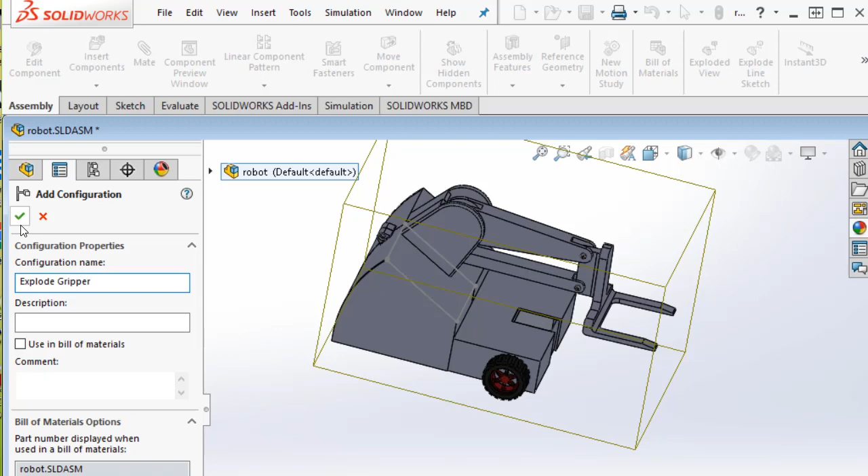Now right down the bottom of here, which I can't find, does this, bring it up into the window. There's a thing called a display states, and we're in a particular display state now, so I'm going to create a new display state.

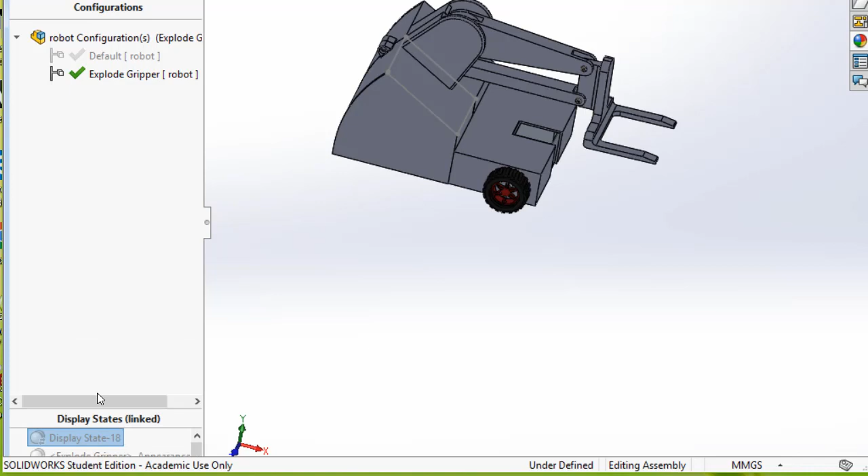Add a display state, and that has now been added. Explode Gripper is the name of the appearance display state. I'm going to right click on that and look at its properties, and I'm going to make sure I've ticked this, which is to link the display state to the configuration. So I'm going to accept that, and now when I'm in the Explode Gripper configuration, I'll also be in this exploded display state.

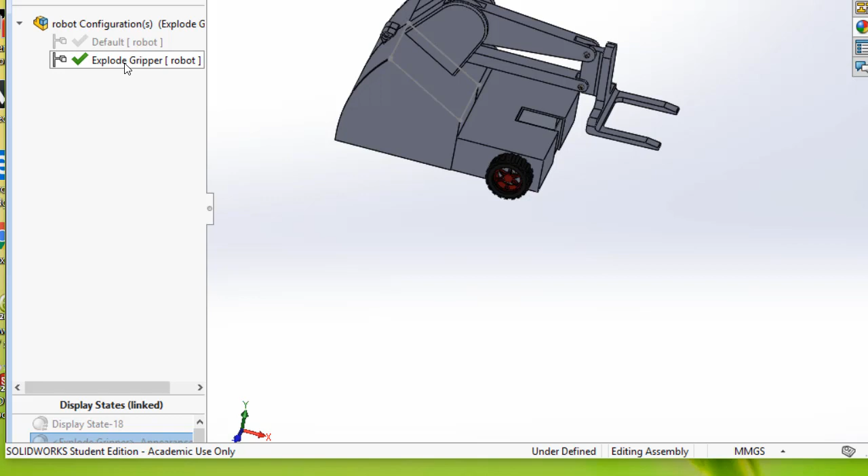So then, now that I've created my new display state, I'm going to actually display the robot in the state that I want it. That means I'm going to remove or hide all of the parts which are not part of the gripper.

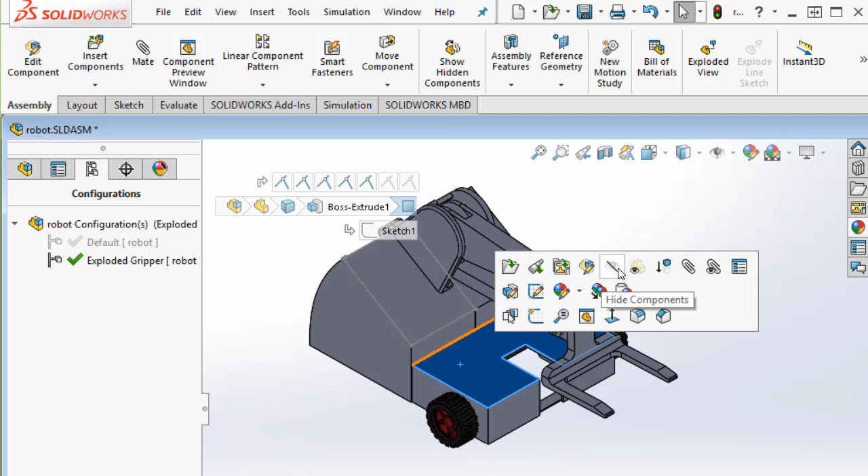To do that, I click on any part and I can choose the eyeball with the line through it and hide that part. It's going to take me a while to get rid of all of these parts, but hopefully by the time you see this, it will have been sped up so that it doesn't take all that long.

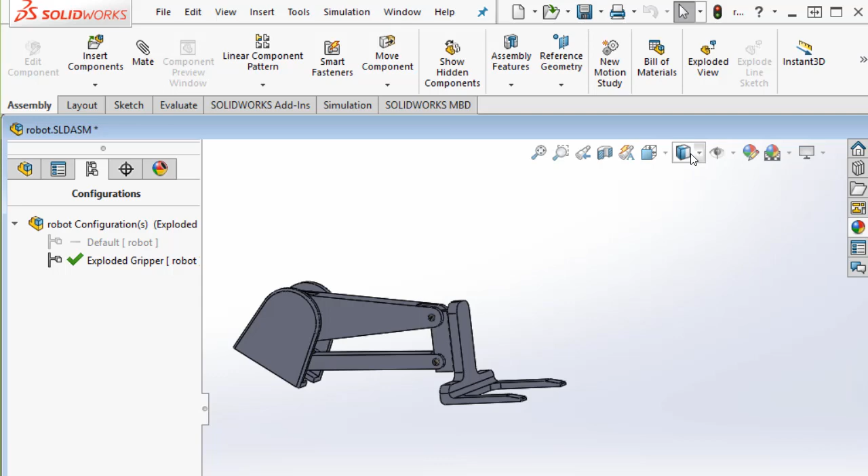Now I'm going to try and put the thing into an isometric view, which is the way I want it to be when I explode it. So click on there and click on... Okay, don't click on there, move it over somewhere. Now click on that. Let's see if we can get... Right, the thing that I want is hiding. Click on there, and we will click on...

Isometric. So now we've got the robot displayed the way we want it, we're ready to start exploding it.

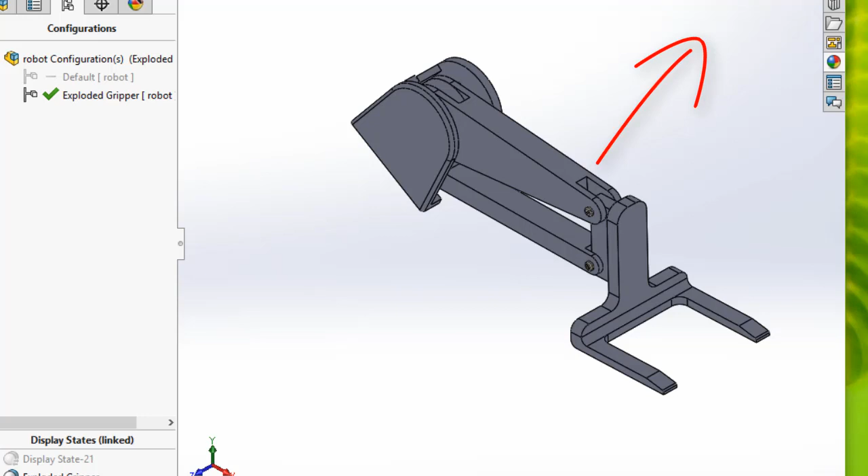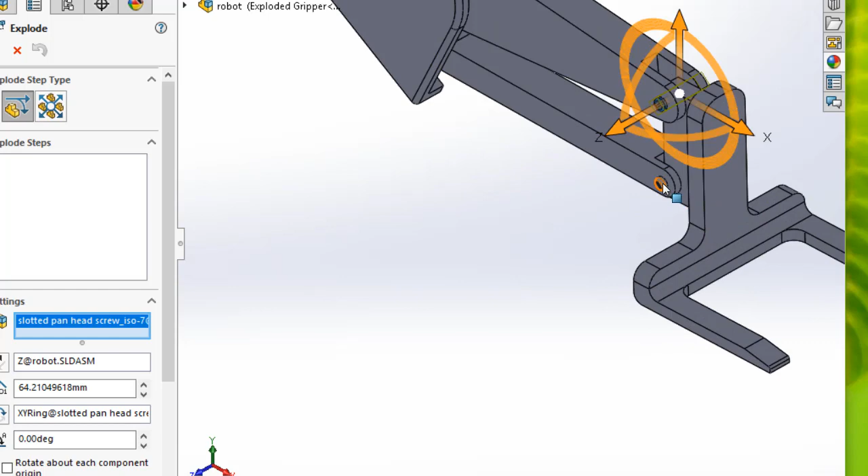So we click on Exploded View up here, and we're going to start pulling the thing apart as if it was a real object which had to physically be pulled apart. So the first thing I'm going to do is pull these two bolts out so that I can remove the grippers. So I'm going to select that bolt and also select this bolt, and pull both of those bolts out.

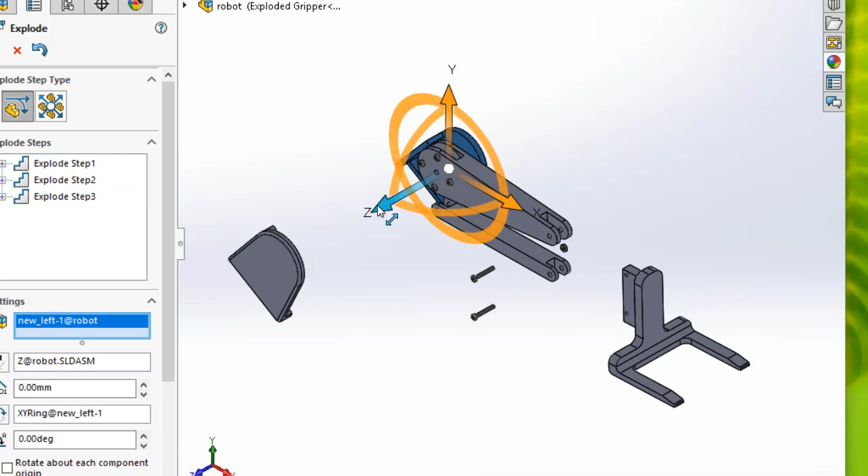That will allow me to then select this part and pull it out. Then I can select this part, pull that in this direction, this part, and push that in that direction.

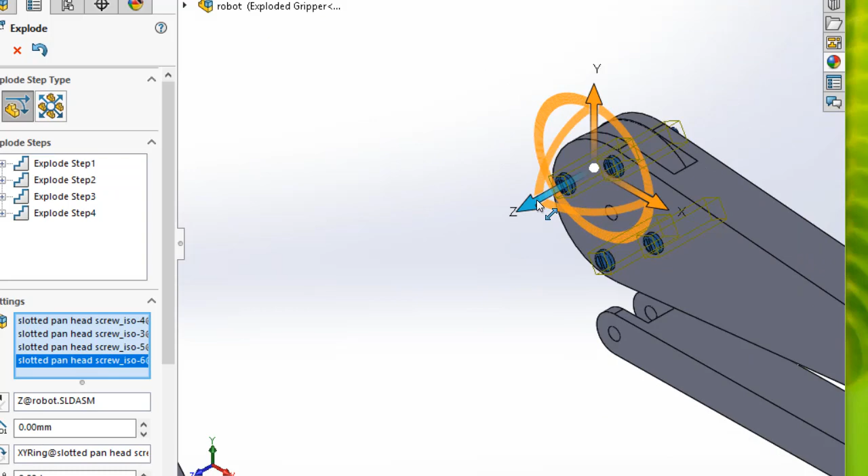Then I'm going to zoom in quite strongly to try and get these bolts separated, and I'm going to try and select that bolt, that bolt, that bolt, and that bolt, and pull all those bolts out. Which will then allow me to select the wheel and push it out in that direction. And finally that part, and push that downwards just to get it separated from that other bit.

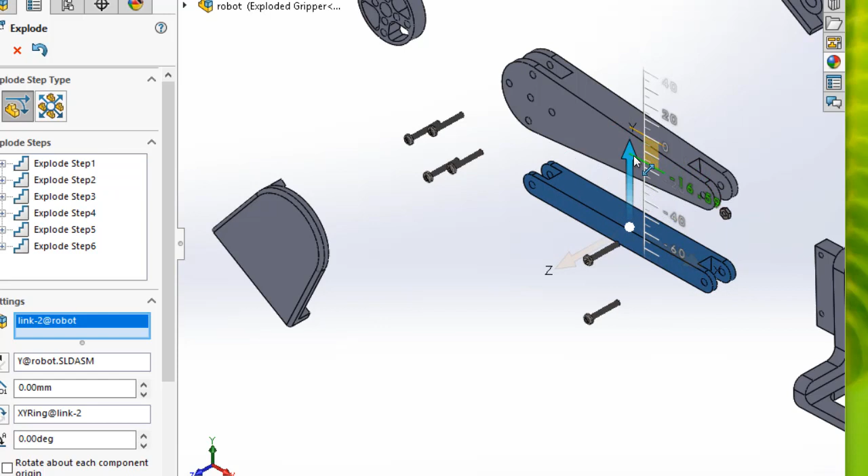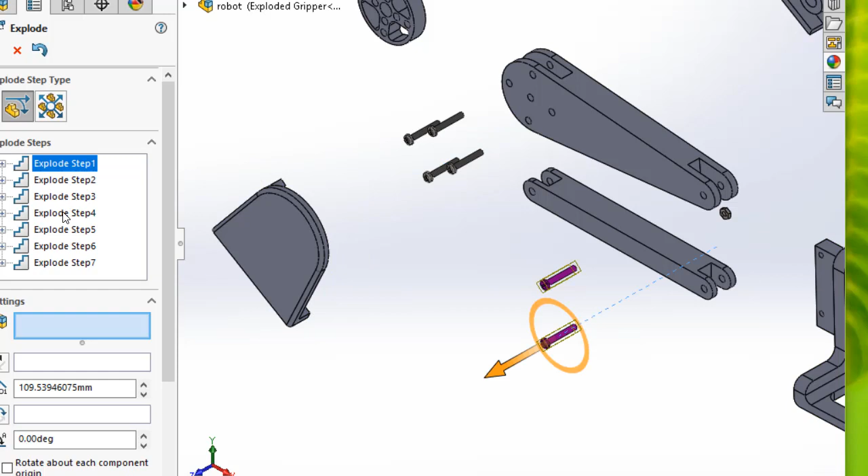And then I might go back to this step and just pull those out a little bit further. You can see that I can just go back to these and edit them to make sure that I've got the right distances between things. But if I look at that now, things seem to be reasonably well separated, so I'm going to leave the exploded diagram at that point.